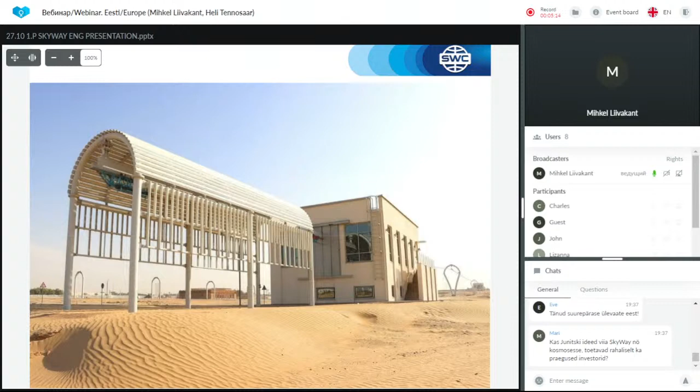That will be the second track, and as we know, the second and third ones will be built in parallel. Those will be about 2.4 kilometers long, much longer, and will be able to hold much heavier weights.

This is the first wooden house ever built in the United Arab Emirates, at least officially. That is an enormous achievement for us, for SkyWay, and for all the investors, because nobody else has built a wooden house in the United Arab Emirates before. SkyWay is the first one, and this is the eco house.

It is supposed to develop, maintain and produce everything by itself, so it doesn't need outside energy sources and so on. This is the future again.

But back to SkyWay - this is the tropical Unicar on the first line. As you can see, it's beautiful, and this one is now certified.

When SkyWay team announced that people could come and test it themselves, to see how comfortable it feels, how people feel when they're inside - these should be luxurious models as well. Those were very successful events and processes.

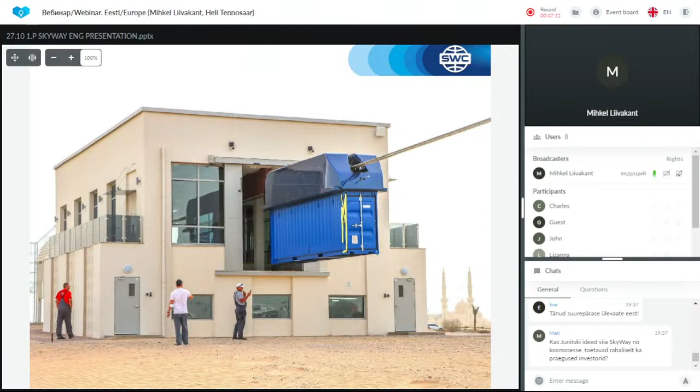This story was covered by French television and many other countries' televisions. This is the smaller sea container transportation system, and this track especially is my personal favorite one, because it's so neat and small - when you're further away you can't even see the line.

That's why it's amazing, but revolutionary again. Now let's start with the main part for all the newcomers and people listening for the first time who maybe don't know that much about SkyWay. I'll tell you briefly about 7 reasons, the 7 whys, which will answer why SkyWay is here to stay, why this is the technology we should invest in and tell our people and investors about. Let's see what it mainly does for the world.

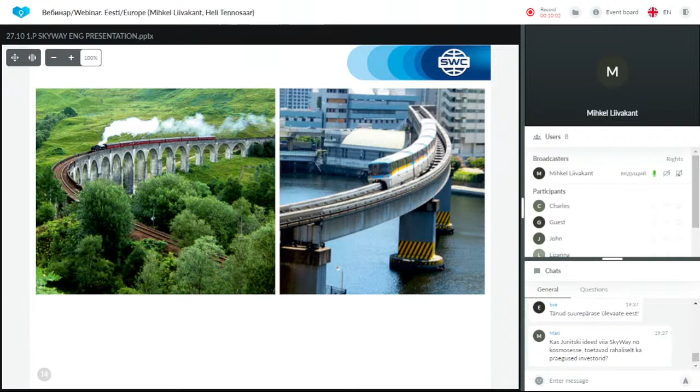I've already shown pictures, but let's see some other technologies that people have come up with and which are in use today. One of those is monorail. It's quite expensive, about 80 million US dollars per kilometer or even more, and very massive if you look at the construction beneath it. It's also quite slow, up to 80 kilometers per hour, and makes a lot of noise.

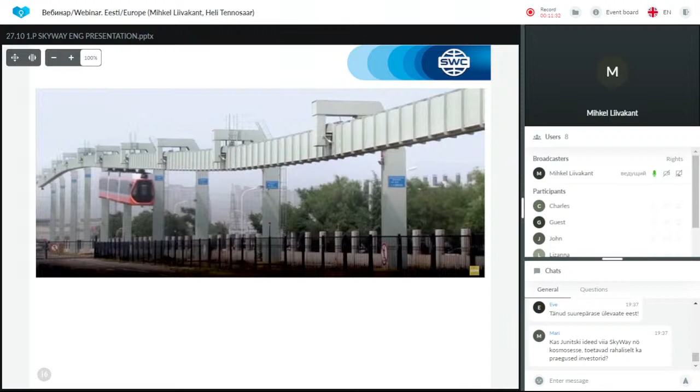This technology you can see on the slide is found in China, and technologically it's basically like a tramway, but upside down - it has wheels on the roof. Otherwise it's quite the same as a tramway.

This one is more interesting, maybe because by the looks it's quite similar to SkyWay, at least on the right side of the picture up there. But the main and biggest problem with this technology, and the main difference with SkyWay, is that the models where people are located and traveling do not move themselves - they cling basically to the string.

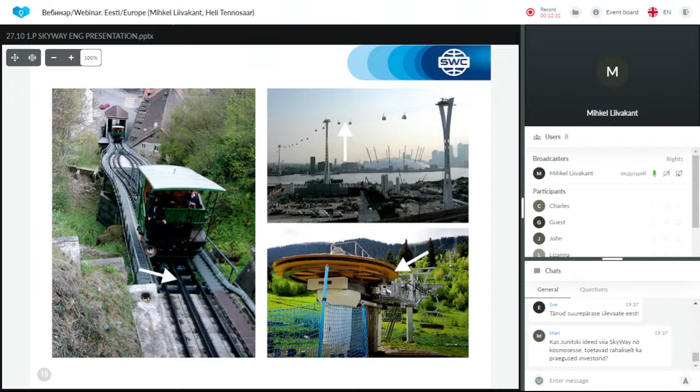And the string moves by the engines that are at the beginning of the road structure, like you can see on the right side, the orange wheel there. That is the engine which spins the strings, and therefore the models move. But Skyway has its own motor wheels, and then can move by itself.

And of course, the most popular technology is Doppelmayr. I showed this picture again on the right side up there. That one is basically a Doppelmayr, and Doppelmayr technology has had many accidents already, and it's quite slow, about 20 kilometers per hour. It's also quite expensive, but its only purpose is to drive people within some area at a slow pace, up high. So it can be fun to ride, and it can be touristic, but it does not have any place as a real connection within the traffic system itself.

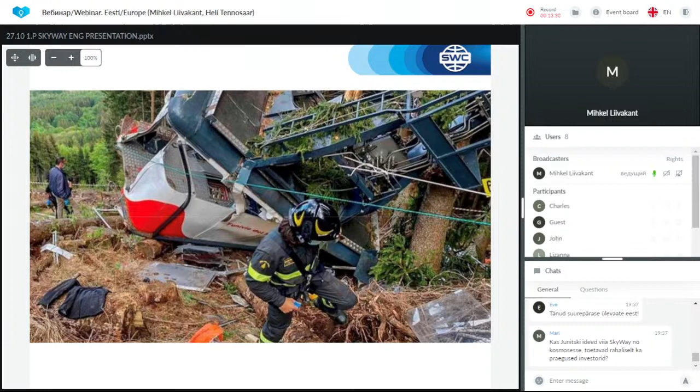But now let's take it to the new age. Let me welcome you to the new technology and tell you more about the Skyway. And as I promised, 7 reasons.

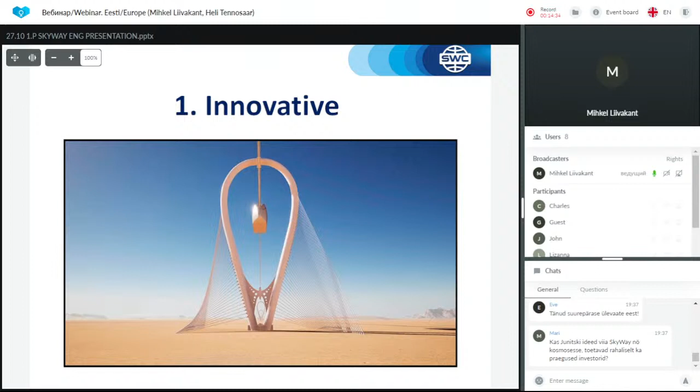The first one is that it is innovative. It is fully electrical, fully autonomous. It doesn't have any drivers on board. It's possible to make the system go so that every 3 seconds a new Unicar, for example, goes out from the station. Of course, we have to think and depend on the people, how much time they need to get on board and then come off, and so on. But it's possible to make it a very effective transportation system, and we can modify it by the needs of a certain environment.

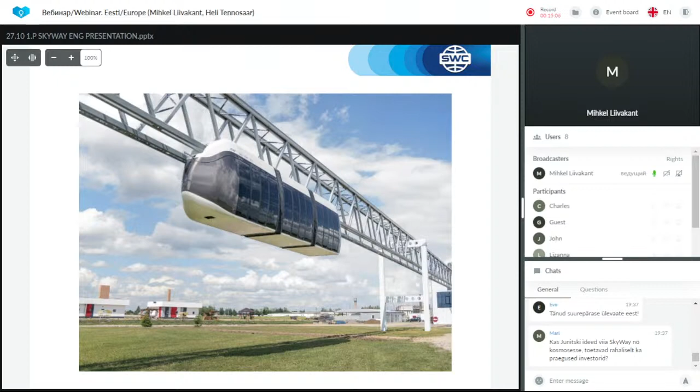The second big difference from, for example, railway is that we can go on 2 sides at the same time with Skyway, so we can ride on the rails and we can ride above the rails. So, for example, on the rails there can be an express line which goes hundreds of kilometers without any stops, but beneath it there can be a model which takes many stops.

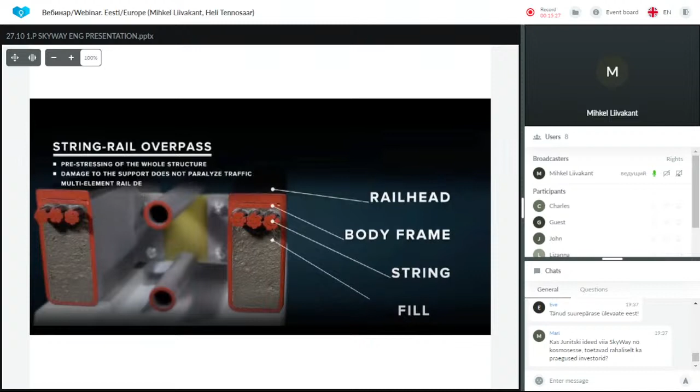And the rail itself, basically inside the metal frame, there is a special filler which fills the pre-stressed strings, which are patented, of course, and makes it very strong. It is amazing, and we can even take electricity or internet or different cables through the track structure itself.

The second point is that the Skyway is very ecological, as you can see in the picture. And here comes the point also, which I described before, that we can go both above and beneath the track structure at the same time, simultaneously two ways. So it's impossible with tramways or other technologies.

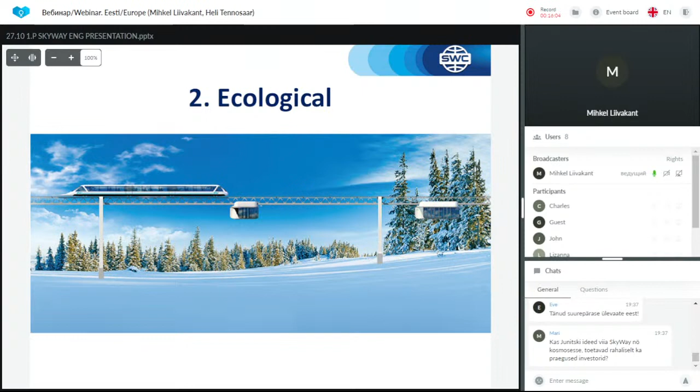We all know about CO2 levels, and those have to be reduced. Governments are doing all the efforts they can in order to reduce the CO2 levels, which directly relate to the emissions from some actions we have taken. So the automobiles have to be electrical in the future and so on. Within, I think, a few decades we will see fully electrical environments, at least here in Europe and in the United States, and other developed countries.

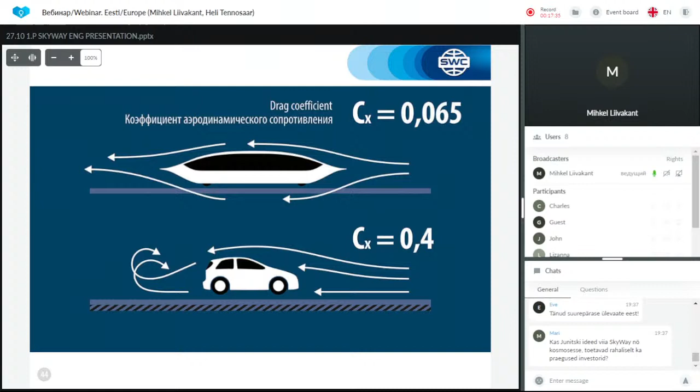Another point which makes it ecological is the wind resistance, which is about 6 times less than with a normal car. The shape of the body of the Unicars is made to cut the wind, very thoroughly thought out by our lead engineer, Dr. Anatoli Unitsky, who is the creator of this technology. The other aspect is that with cars, if you drive on an asphalt road, the wind goes beneath the car and causes a screen effect. Our technology does not have that, which makes it cut the wind much better, and therefore the wind resistance is much lower.

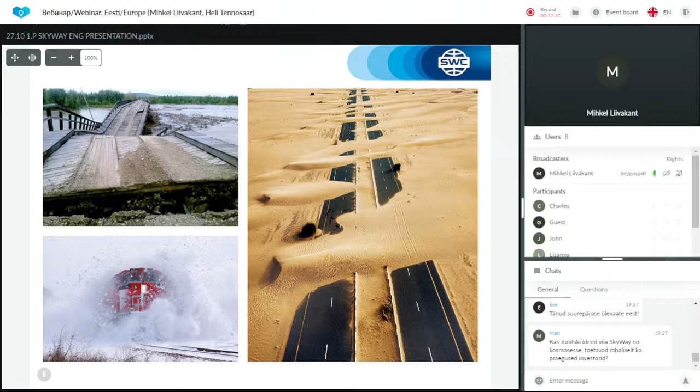Yes, and all different kinds of problems which occur constantly today with our known technologies and environments are presented on this slide, and it all takes a lot of resources to maintain.

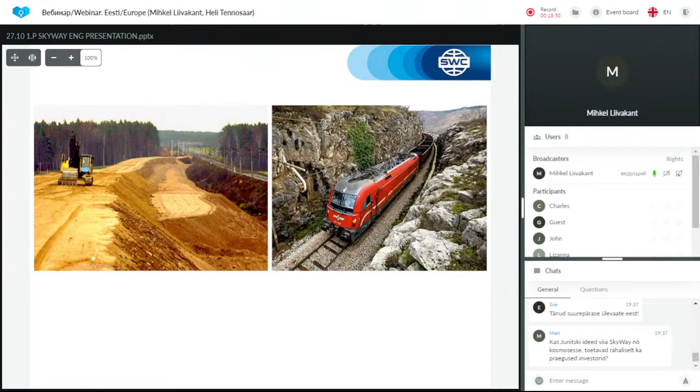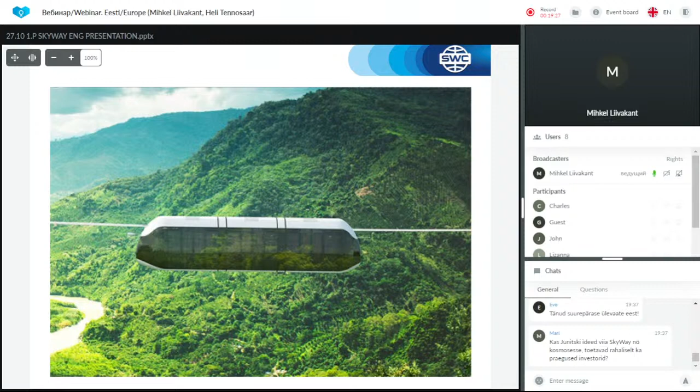And on the right side, the explosions, exploding mountains to construct new roads, also a highly expensive topic. But we have SkyWay technology - we can start it on the mountain, take it to the riverside. We do not need to construct it directly on the landscape itself, so no mountain or river can be an obstacle. There are many great aspects, and 8-hour drives can be reduced to an hour or hour and 30 minutes.

And of course, the growth of population and traffic jams is also a very big problem around the world, because almost every person who has a driving license can and will be driving cars. Today people have much more access - there's a car in every price range, so all the people who want a car can have it, and many people want one. So there are many problems that need to be solved, and one way is SkyWay.

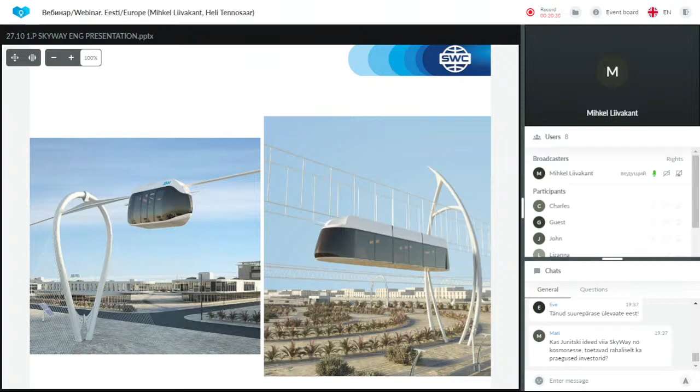Third point, safety. Many people have asked, and the government's first question always, at least one of the first, is: is it safe? How can you provide safety with this technology? I believe everything has been thought through thoroughly, and I will explain using the previous slides.

First of all, we have this motor wheel anti-derailment system. Basically, when we turn SkyWay upside down on the rail structure, it still clings to the rail structure, so it won't fall off. Therefore, the derailment system itself is very strong.

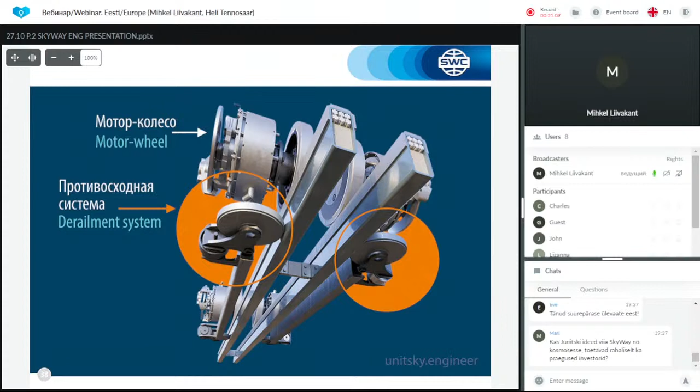Then we have 360 degree cameras that scan the environment constantly, so if any obstacle comes our way, the Unicar, for example, will stop immediately.

This has also been tested, and Dr. Anatoly Unitsky made a video about it - you can Google it or go to your back office and find the news. I believe it was in the spring when he first tested it and showed the video of him running in front of the moving Unicar, and it stopped. Then whichever way Anatoly Unitsky started running, the Unicar either followed or backed away at the same speed. That's quite amazing. There are also interior cameras placed inside.

If anything happens with one model on the road - for example, problems with batteries or whatever - there is a similar model nearby. For example, the Unibus has a partner, another Unibus which will be running beneath it. There are elements in front of the nose and at the back of the models, so they can attach to each other and either pull or lift it to the station.

And if that previous solution is not available or possible, then inside the models, beneath the seats, there are special packages and straps which you can pull around your waist and body and lower yourself down with this mechanism developed by SkyWay engineers. Again, safety is provided in every possible way.

About one or two months ago, a video and news came out from your back office showing a man demonstrating this whole process, every piece of it, and he successfully landed on the ground, was healthy, and so on.

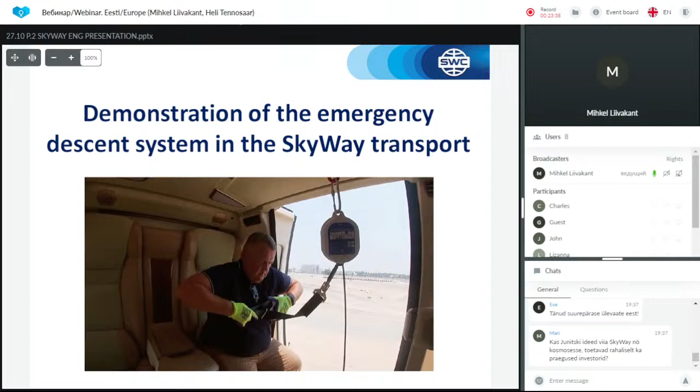Fabulous, I can say fabulous, and I believe it's much more safe to drive with SkyWay than to drive in the way that is done, of course, in many countries every day. All right, let's move on.

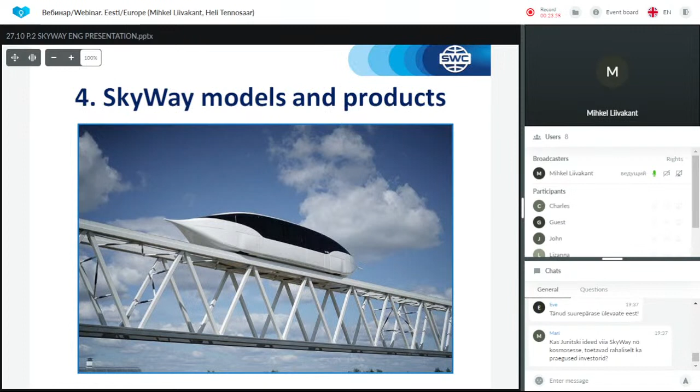Fourth point is that we have real models, products, and many of them are already certified. As you might remember, in the beginning I said that we got our certification of the first track in United Arab Emirates as well.

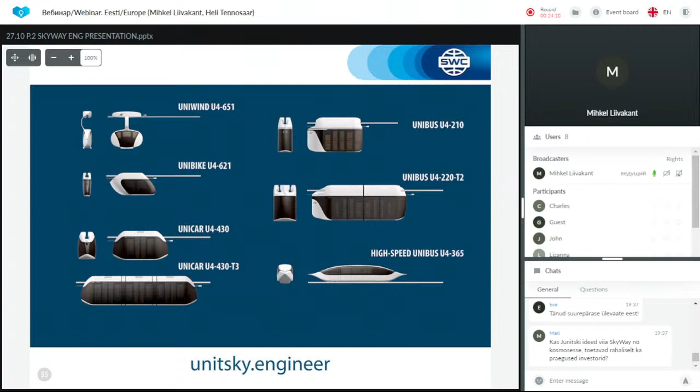So we are not just showing pictures, but we have real products and products that are needed. And then we have contracts and the building of the tracks, the commercial tracks which will bring money to the company, and therefore 20% of that will be divided between investors, and everybody can become an investor today.

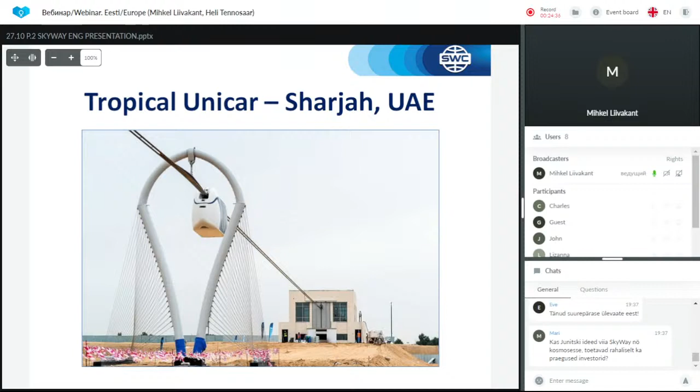The fifth point is that the demand for SkyWay is everywhere today. We started from Republic of Belarus. We have made our way to United Arab Emirates. As we know, at the end of last year, we started the certification process in 4 European countries as well. Soon we should have these certifications and the processes far enough that we can start making more detailed contracts in European countries as well. At least now I know that on every continent we have our own partners who will work to get the technology out there. So demand is everywhere.

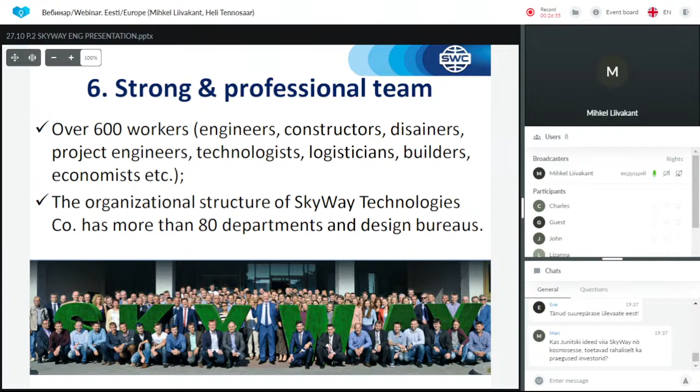And the seventh point is that it is financially beneficial, and of course the first group of people are investors who will be financially benefiting from the success of SkyWay, because 20% of all the profits will be divided between all the investors, depending on how many shares they have. So it's more than necessary for investors to wait patiently to help promote the technology, because as we know, money is fuel. Therefore investors are needed to promote, build, and develop it.

And one day, when the day comes in the near future, when we start profiting from the projects, and we start benefiting from the dividends, or we can sell our shares on the stock market, then we'll understand what we did back on that day when we first heard about this technology.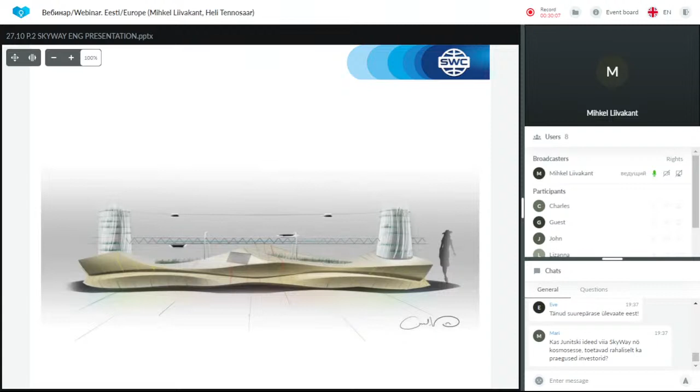And the second news is that we will take part in the Expo in Dubai. So whenever you go to the Expo this year up to next year's March, you can go and visit the SkyWay section as well. And I know that the bigger participants who want to see the technology themselves can go even to the Sharjah Innovation Center. This is the mock-up that will be presented there in the expo area.

Now back to the numbers, which is also great about this technology. The mother company, Unitsky String Technologies, which owns the company, will release each year a financial audit of their results - the incomes, outcomes, profits and so on. So every person who wants can go to their back office and see this document as well.

And quite recently, diplomats from 20 different countries visited the Unitsky String Technologies Center in Sharjah. What will happen after this event we don't know yet, but it must be great because they were all very satisfied and will talk about this technology to other members of high-level corporations and so on. The technology can come to reality.

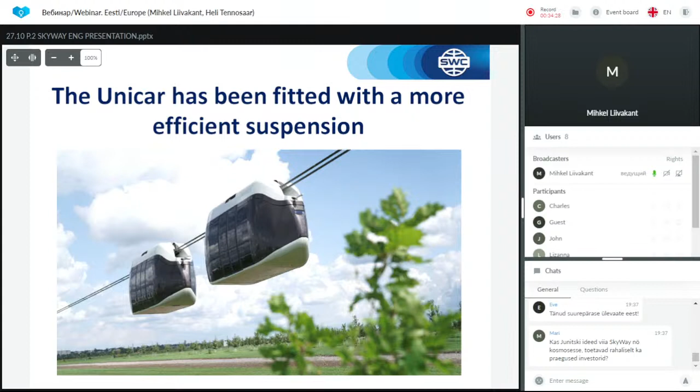And then the Unicar - of course we are developing our technology constantly as well. As you know, the rails got a different layer on them to make the rides much smoother and the noise pollution much lower. Now it has been fitted with a more efficient suspension, so the development constantly goes on.

And the last news is that Anatoli Unitsky, the general designer of Unitsky String Technologies, participated in the GITEX forum, the largest exhibition in the field of innovations in Dubai. He gave a speech saying we should go into space, but not for just any reason - all our problems on Earth, he said, are created by industry. Electricity and chemical industry should be taken out of our biosphere. The only place where we can do that is 300 kilometers above the Earth, and he has the solution for how to do it. If you want to read more, just go to your back office - it's one of the most recent news there, so you can easily find it under the news section.